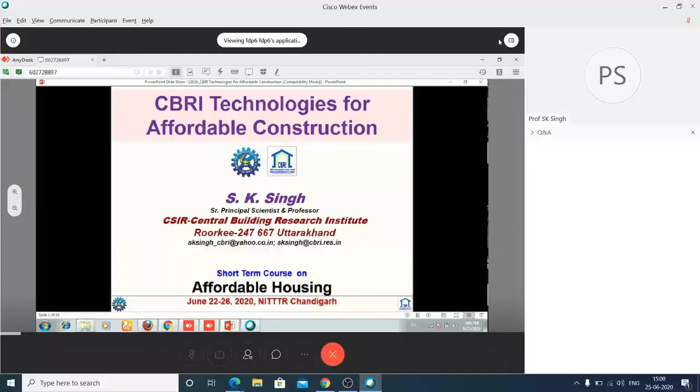Here, if you talk about affordability, it doesn't mean that we are talking about low cost. It means any person can have affordability, starting from EWS housing, LIG, and MIG. So we are going with that.

Before going to this one, I'd like to take 2 minutes on where we are working. CSIR Central Building Research Institute is working in 4-5 major areas: advanced materials, disaster mitigation, health monitoring, energy efficient building, and modeling and simulation. I'm heading the cement concrete composite group and polymer plastics and composite group. We have 2-3 groups in every area, and different divisions have been working.

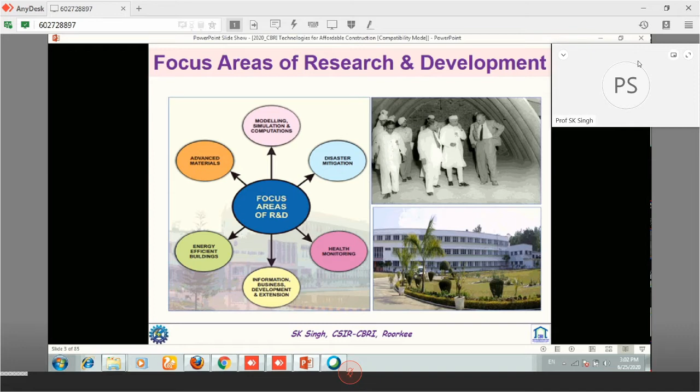CBRI was established just before independence, on 8th February 1947, by our Honorable first Prime Minister. The building was inaugurated by our first Prime Minister, but it was established in the University of Roorkee building with 5 people. So now I'm coming to the topic, which is affordable housing.

So we are talking about prefab precast systems, which will be affordable, and different types of systems have been coming up. There is partially precast construction, where CBRI has done very large work. Another is precast construction, tunnel form construction, large area formwork construction, lightweight concrete construction, cold-formed steel housing system, GFRG building system, EPS panel, ferrocement housing, and several other emerging trends in prefabricated and precast construction systems.

But if you talk about affordability, we particularly have to look into the vernacular material which can be properly utilized, and some precast systems where we can economize.

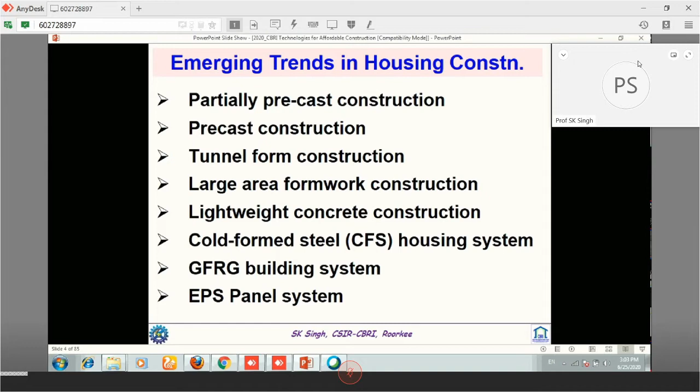When I talk about affordability through precast and prefab, it means we should utilize construction materials judiciously, reduce construction waste, reduce emissions, use durable materials, energy efficient building, materials that can be recycled, and construction systems that minimize air, water, and noise pollution.

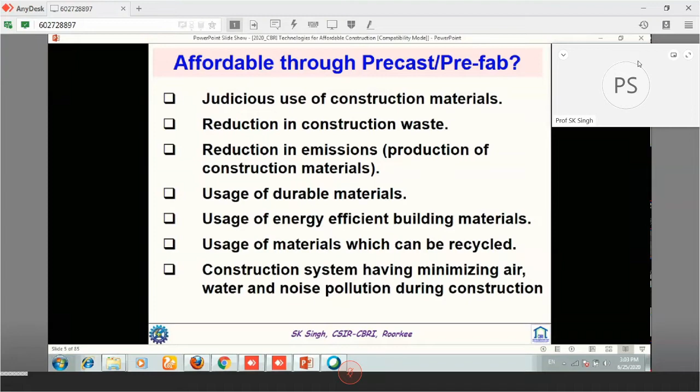CBRI has developed several technologies, but today we'll talk about precast walling components, such as stone masonry block, solid concrete block. We'll also talk about geopolymer, precast lintels, sunshades, and what CBRI developed in the past - the precast flooring roofing system, that is RC plank and joist, channel unit, rib slab, L panel, waffle units, brick panel, etc.

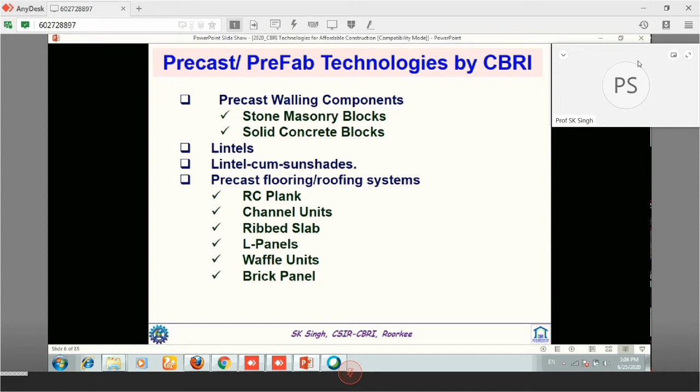We have utilized paving blocks with recycled aggregate, some part in geopolymer concrete, and several other technologies. It's a very good place where attendees or listeners can come and visit, and they can utilize these technologies in their own systems.

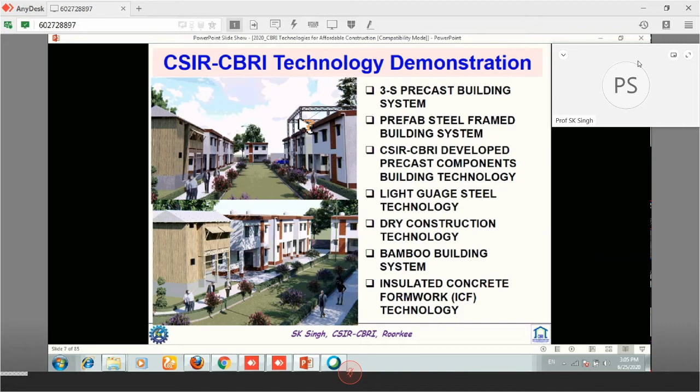Whenever we are proposing or developing any technology, our aim is to look into its functionality. So we are very cautious before submitting a proposal - it has to pass functionality tests, including fire resistance, seismic load, axial load, water tightness which is very important, thermal efficiency, durability, and comfort and other tests.

It has usually been observed that in these buildings, whether partially precast, semi precast, or complete precast, leakage and seepage was a major issue. So whatever we are developing, we have tried to resolve those issues and address them.

For comfort particularly, we have given emphasis on thermal studies, noise isolation, relative humidity studies, and indoor and outdoor air quality. We look into how it can fulfill our National Building Code of India 2016, and what comfort requirements we need, utilizing various types of materials developed at CBRI or at other places.

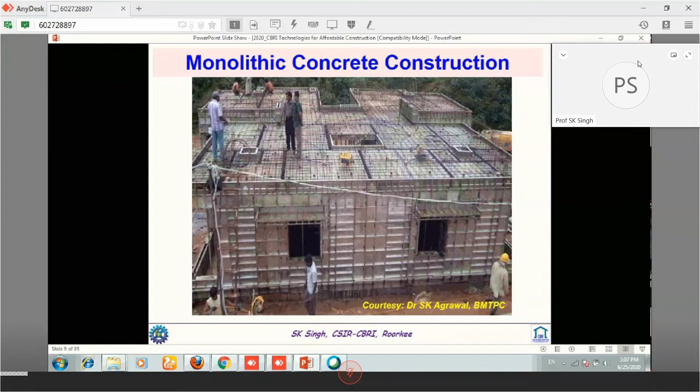We have not directly developed this technology, but we have been in the evaluation process along with BMTPC on monolithic concrete construction. In this system, the whole formwork is made, and all the reinforcement and other things are put into place, and concreting is carried out in one pour, meaning all units - walling, flooring, staircase, window openings - all those things are made together.

This type of building is customized, and up to G+3 has been constructed. This formwork is mainly made with aluminum, steel, and sometimes a plastic-aluminum composite. Some people have tried with plastic also, but there were deformations and other issues. So we use an appropriate grade of concrete with proper slump or flowability, and we have placed and constructed this type of building in different places.

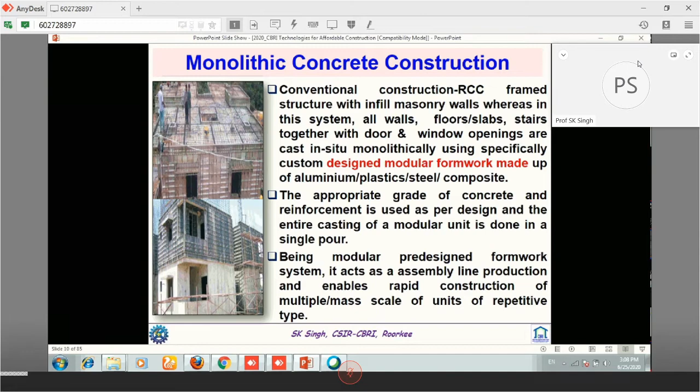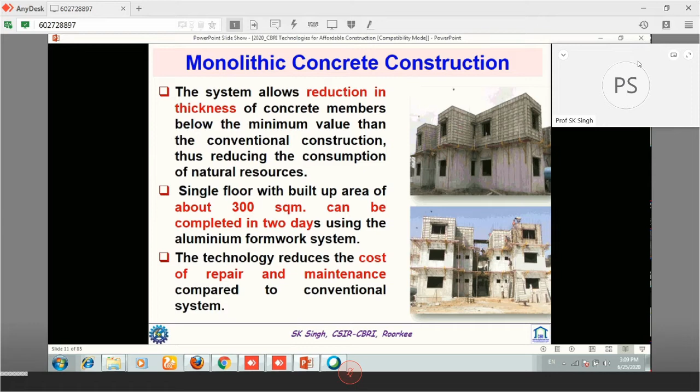A single floor with a built-up area of about 300 square meters has been completed within 2 days. This technology gives a very good walling and slab finish, and involves very little futuristic repair and maintenance work. So it is one of the best methods, and cost comparisons have been carried out. Looking at overall cost and life ratios, it is found to be very economical compared to the conventional system. Several people have tried to reduce the thickness for comfort level, so more industries are coming into this.

Houses have been constructed near Delhi as demonstrations, and you can look into that.

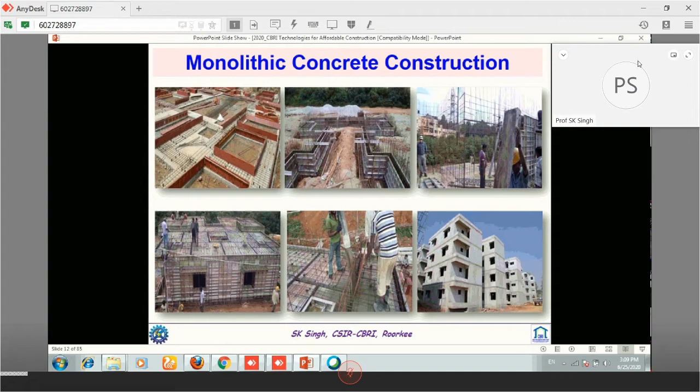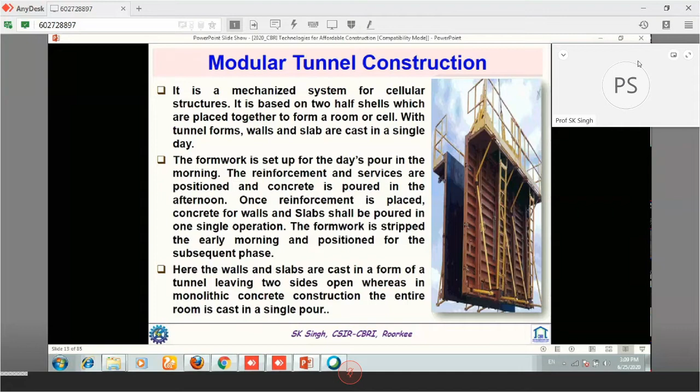Next is a modular tunnel construction system, which works in the same way, but here a different type of shuttering system has been created, and the thickness can be increased as needed. Pouring of the concrete is carried out in the same way.

It's a very fast and very economical system, but the economics only work when the number of units is in sufficient quantity so that the overhead cost can be minimized.

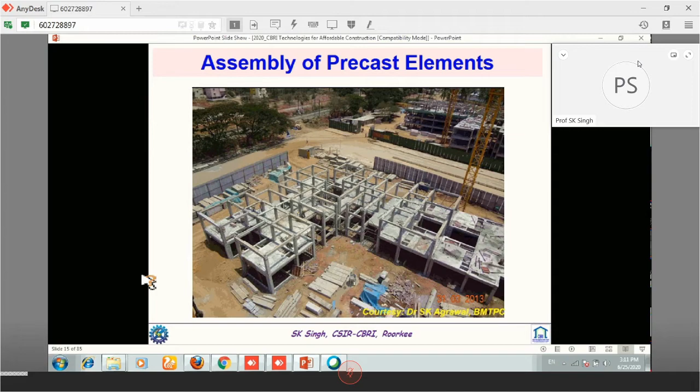We have also carried out different precast column and beam units. These are placed at one location, and self-compacting concrete with dowel bars is created and put into the slab. This type of construction is becoming more and more common in this system.

We carried out evaluations along with the B.G. Shirke group on the industrialized 3S system. Myself and Dr. Ajay Chaurasia were both involved. Particularly in this system, they are making G+7, G+8 buildings. More than 50,000 units have already been constructed in Delhi, Mumbai, and different parts of the country.

Recently, NIT Warangal was given an award worth 300 crores through this system, and it is very effective. Initially, people observed some problem of leakage at the joineries and other things, but that has been addressed properly in our next system.

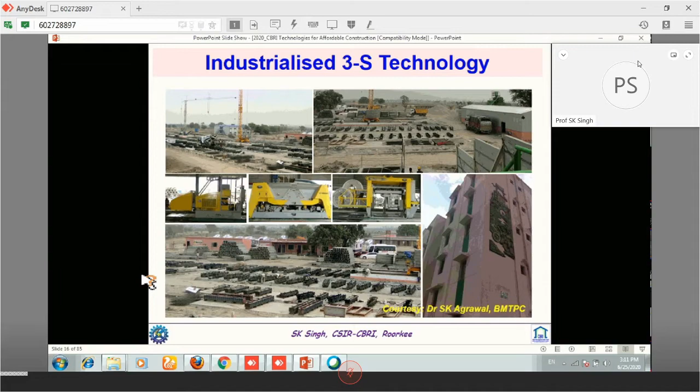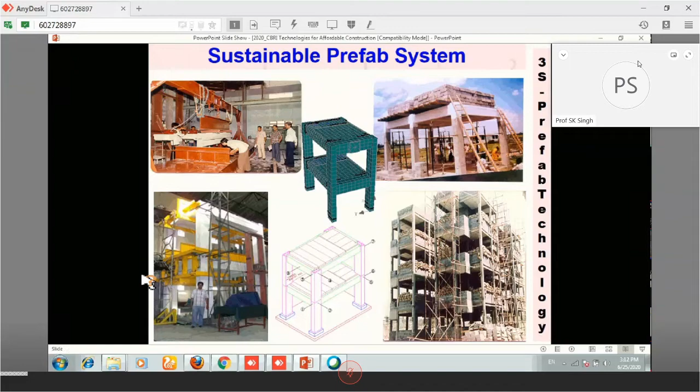This system has been evaluated at CBRI, in our laboratory. Dr. Ajay Chaurasia was project leader, and I was co-PI. We carried out all the testing of a G+1 storied building for lateral loading, and it performed well. Dead loadings and other tests were also carried out. This is another view of the seismic testing, and we have also done fire testing.

It's a very unique system, the 3S system. They use a hollow type column system, attached with dowel bar type connections to the beam system, and self-compacting concrete is poured into that, creating different floors. Very nicely, they have put an aerated autoclaved system on the flooring, and above that only a 50 to 55 mm thick screed concrete with minimum distribution reinforcement has been provided. This works fantastically in every way.

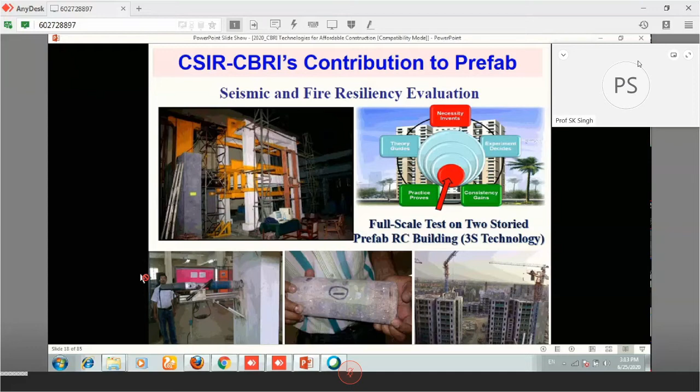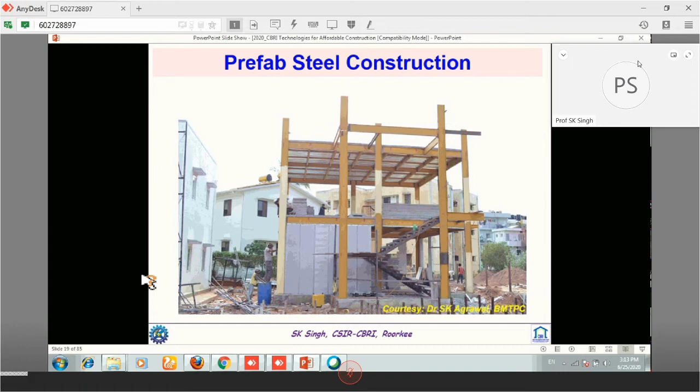Prefab steel construction definitely cannot be considered as economical, but it is affordable and a very quick and fast system. Different panels have been provided into the system. We have also done a demonstration house with the light gauge steel system and sandwich panel system, which provides good comfort.

Presently, light gauge steel structural system is becoming very popular. Several buildings in Uttarakhand and other places have been constructed. Near Dehradun, at one place called Selaqui, they have a plant fabricating this light gauge steel structural system; they have invested more than some 20 crore rupees, and all types of systems, all types of gauge, and up to G+4 storey buildings have been constructed with this system.

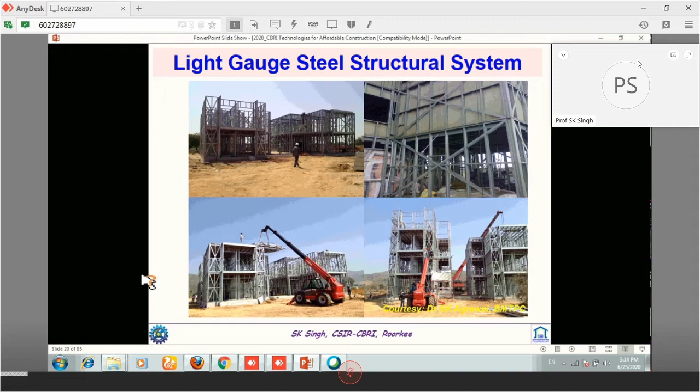Also, GFRG panel system. I'm not taking much time on these things. This Wafflecrete system was developed some 20-25 years back at CBRI, and a few people have taken the technology. Different types of waffles are made, then distribution reinforcement is provided and screed concrete over that into the main system. It is becoming popular nowadays.

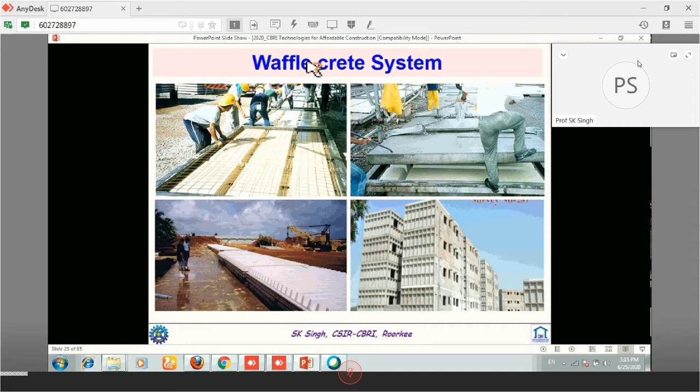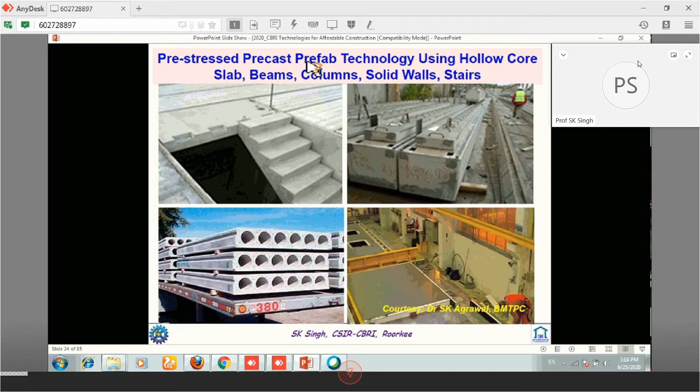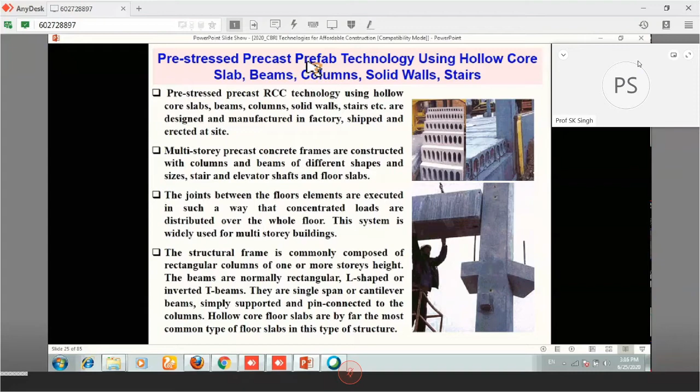This is again the hollow core slab and beam column system, with which a few buildings have been constructed, because in India prefab construction is still picking up, so it will take a little time, and we can carry out those systems. This one is very peculiar, where we have solid factory-made columns and beams, and then we put the hollow core slabs and other things over that.

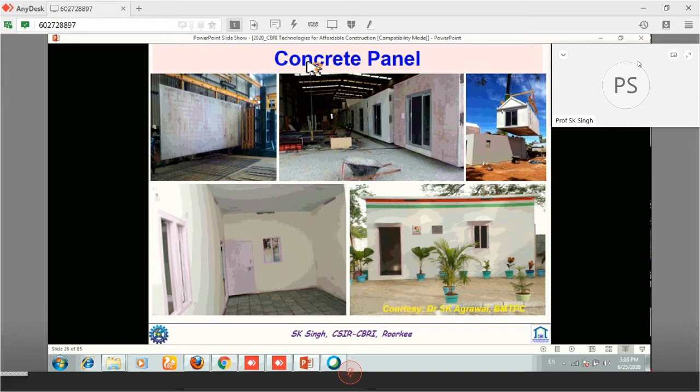This is a concrete panel, and again, it is becoming a very popular and very affordable system. This is again an expanded steel mesh panel system, and in place of EPS, they are using polystyrene beads, and it has been performing very nicely, and its behavior in fire has also been found very effective.

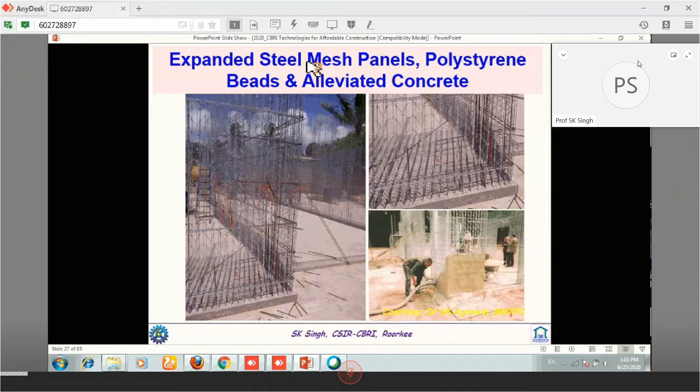I am coming to the CBRI technology. We have made more than several lakhs of buildings with the partial prefabricated system, called the joist and panel system, and this has been made in Delhi, some 20,000 in different places. We have made a rib, and the joist is some 100 mm wide and 130 mm deep, and it varies from 150 to 300 sometimes as required. Wherever we have done the panelling, the panel is 60 mm thick, and minimum reinforcement of 6 mm has been provided.

Other technologies, like the L panel and others, we are going to discuss one by one. But here we have done a partial system in the roofing unit, sometimes columns, windows, staircases, and it has been found very cost effective. Initially those low cost housing buildings were constructed in Delhi and other parts of the country with this system, and this precast system has been very effective.

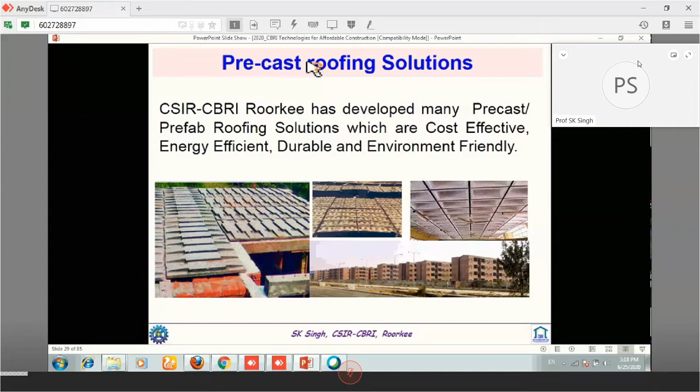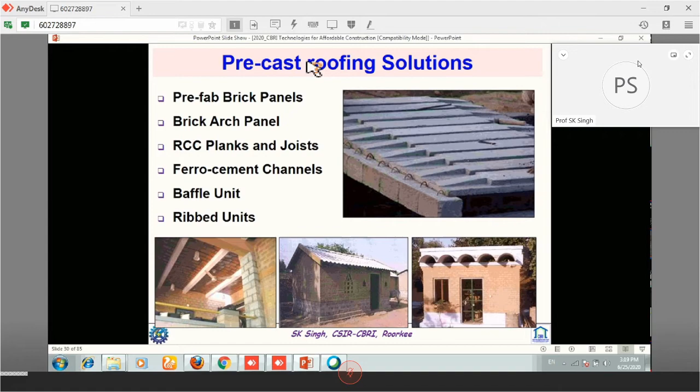We have other systems also: prefab brick panel system, brick arch panel system, and, as we said, the planks and joist system. Ferro cement channels have been developed by CBRI, and waffle units and ribbed units have been constructed. In the prefab brick panel for roofing, the RC joist is usually 130 mm wide and 100 mm deep, to place the brick panels over those RCC joists.

Brick panel sizes are 530 mm wide, 900 to 1200 mm long, and 75 mm deep. To make these brick panels, only two numbers of 6 mm dia bars are used, I am going to show you this one, and we provide cement concrete of 30 to 40 mm thickness over the panel and joist as screed concrete.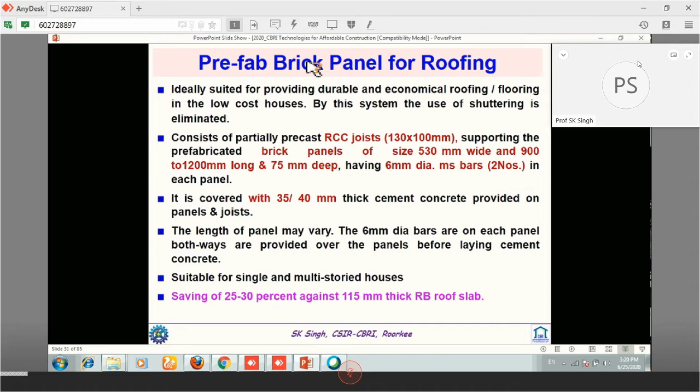Due to very little reinforcing steel, or saving of steel, one thing has been found: wherever this type of brick panel unit has been constructed, the corrosion problem was very less, and overall cost is reduced by 25 to 30%, because of the reduced thickness, against a 115 thick reinforced brick roof slab. So it is very good, and at several places people are trying this type of system right now. This is the view: this is the joist, and these are the brick panels. I am showing you a closer view.

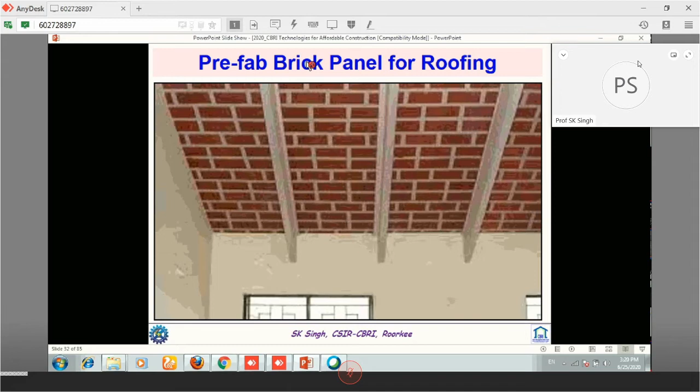The IS codes 14142 and 14143 have been made by CBRI, where all the design and construction details are given for prefabricated brick panels and partially precast concrete joists for flooring and roofing. So you can look into those codes also.

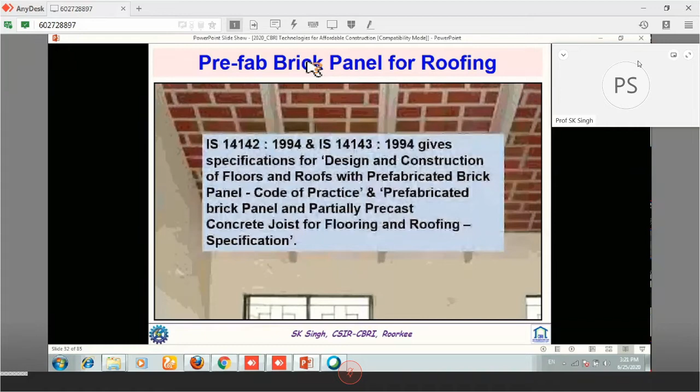This is our joist. It can have some 3 meter to 5 meter of length, and a simple 6 mm bar will be folded like this way, and the depth of this beam is kept 100 and width is 130. So on all the sides, brick panels will be made, and then over that simply M20 or M15 grade concrete is sufficient to fill up those reinforcing bars. So it is very economical and cheap, and at several places we have constructed this thing.

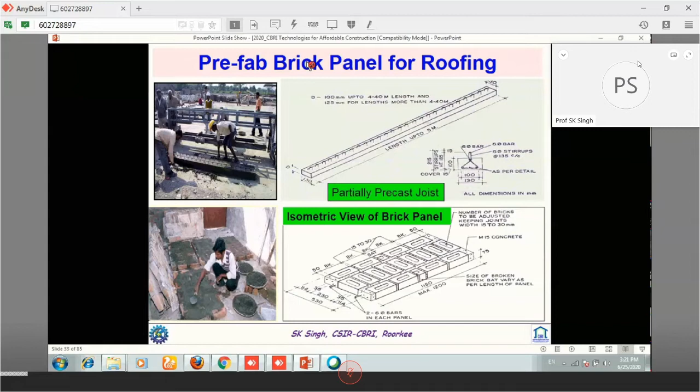Sometimes people want a very good brick view, so people do it, and sometimes people make it plaster. It's very good because no cost for shuttering will be required. It's very fast if you make these brick panels and transport them to the roofing unit, so it will be economical. Also its conductivity is less, so thermally it has been found that compared to a reinforced cement concrete roof slab it is effective, with a reduction in temperature of about 20 to 25%, meaning a variation of 3 to 4 degrees inside the room.

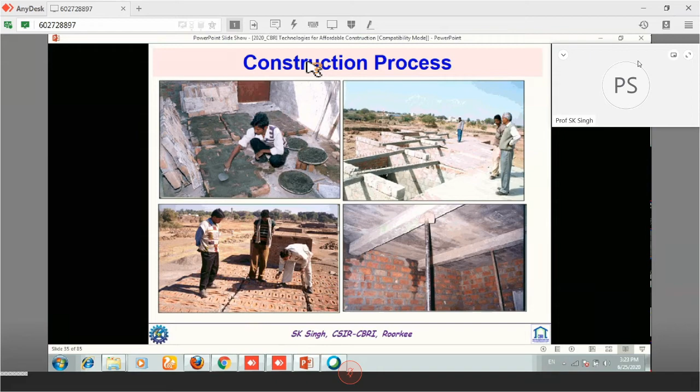This process has been explained. Simply the walling unit is made, then the joist is placed, then panels are placed over that. On top of that, only 35 to 40 thick screed concrete of M15 has been carried out. It is sufficient for that. Also it is durable because we put compaction by simple hand or by tampers and other things in a very good way.

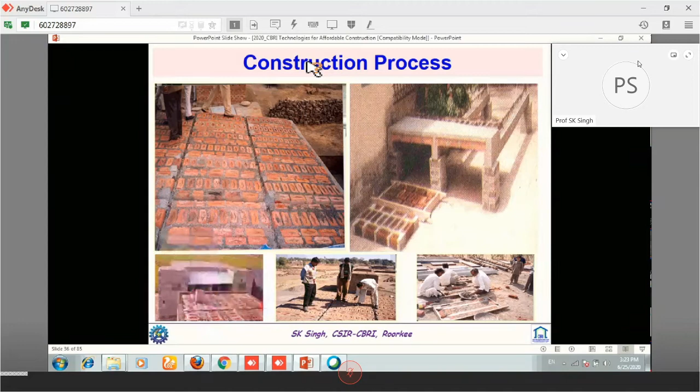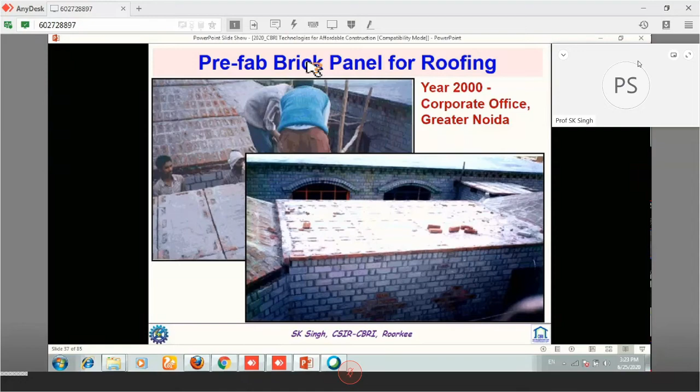This is the construction at Greater Noida in year 2000, and at several new places people have constructed it. Nowadays, when people talk about energy efficient buildings with a unique look, people are making it on their top floor and other places also.

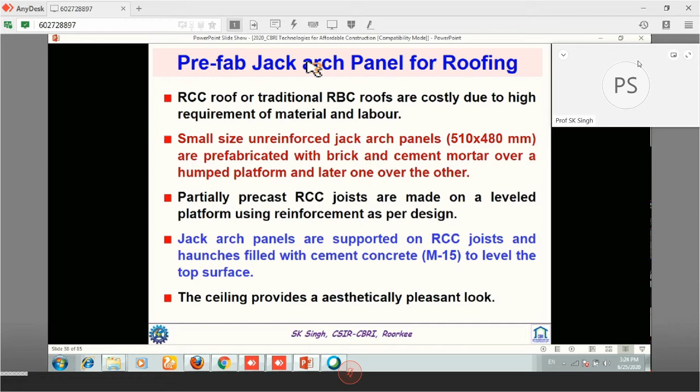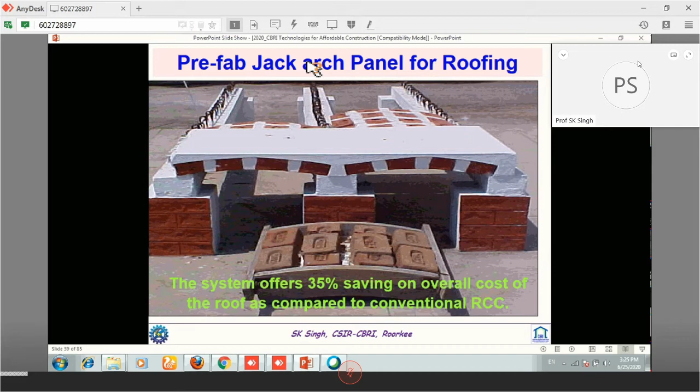If you look into it, it's very small, good and efficient, and look-wise from below, a very nice arch appears in any building, and people prefer those vernacular things. This system has been found to give a cost saving in roofing of about 35% over a reinforced cement concrete roof of 115 thick.

These panels have been made, as we have discussed. This is RC planks and joist, and different sizes of planks have been made and placed over the joist. If anybody has visited CBRI, all our scientist apartments, G+1, have been made this way, and particularly in Burari and other places in Delhi, some 10,000 to 20,000 houses have been made with this system of precast planks and joist, and those have been very efficient and people are living in them. That was particularly for EWS housing or low cost housing.

Nowadays, I have done in my lab a 3 meter long, 600 wide panel with geopolymer. Because lifting has changed, this cross section goes up to 4.2 meter long, and we are going for more and more. Accordingly, joists are placed, and it has been found that overall cost saving is about 20%, with 25% saving in cement and more than 10% in steel compared to the conventional reinforced concrete slab system.

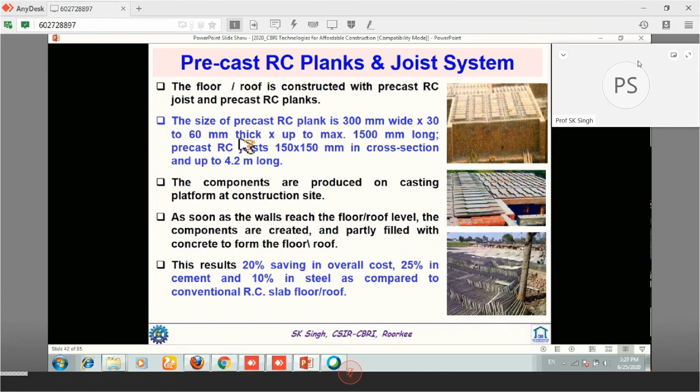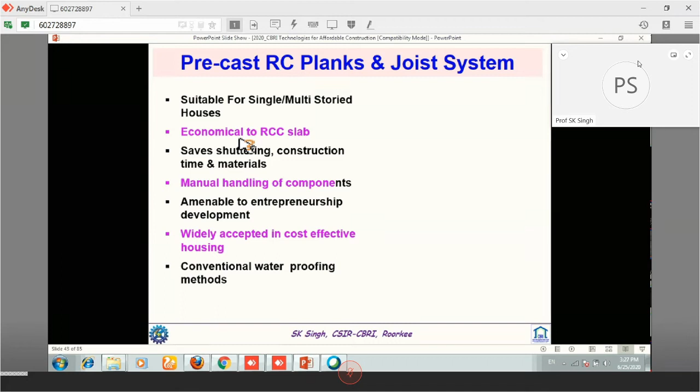These slabs have been made in different places, in thousands and thousands, very economical. And with this system, I'm not sure, but more than several lakhs of buildings or housing units have been made in different places of the country.

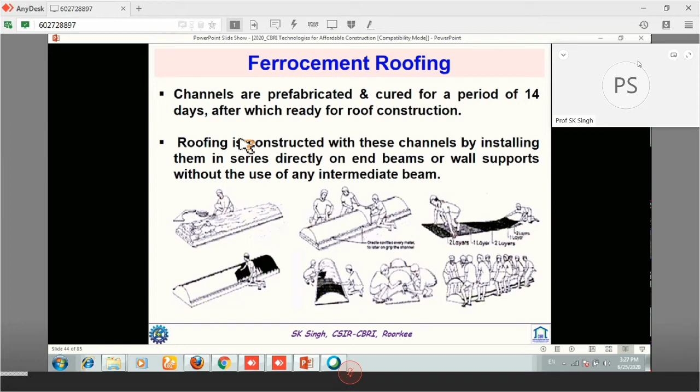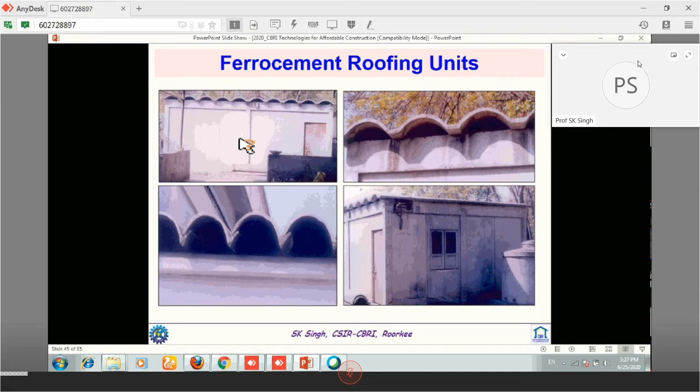Also, we have worked on ferro cement roofing units, and we have done it successfully. We have demonstrated at different places different types, with curvilinear shapes, minimizing the thickness. Thickness we have kept about 25 to 30, with some small false ceiling below that on the room side. So different types of systems have been made, temples and other things.

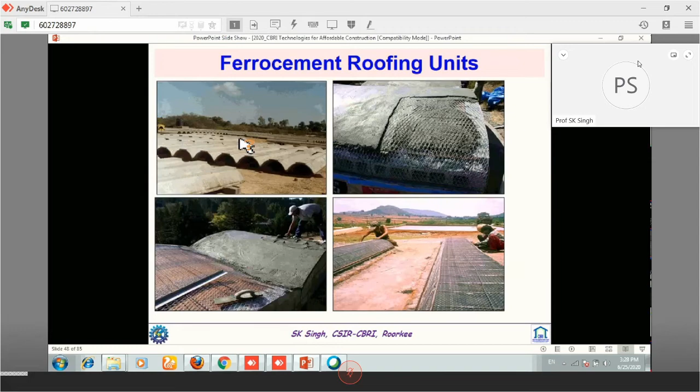I'm not going through this one. This is being demonstrated, and different types of units have been made and constructed. I was very young when I was making this one, I was 27 years old, and we constructed this type of houses in Meghalaya and other places in the Northeast.

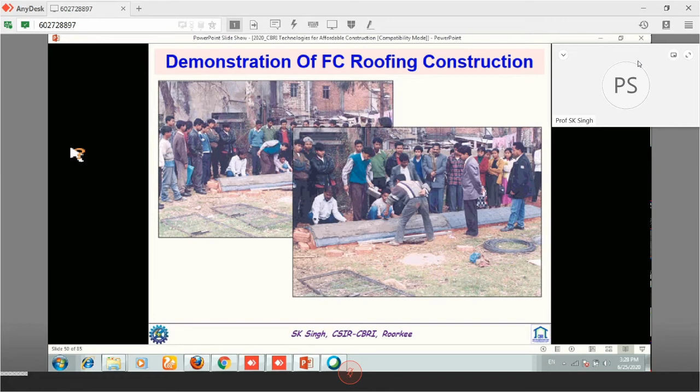And different types of ferro cement products, walling units, water tanks, cupboards, all those things have been made. Doors have been demonstrated, toilets, cabins, security cabins. Also, CBRI has done work and developed codes on the L panel, particularly for sloping roofing of single-storied buildings. That is very effective with a very small thickness. If you look, very long panels have been constructed here, and these are the houses with those roofing units.

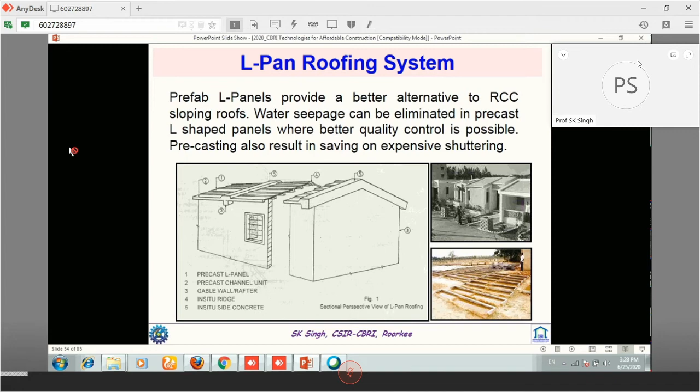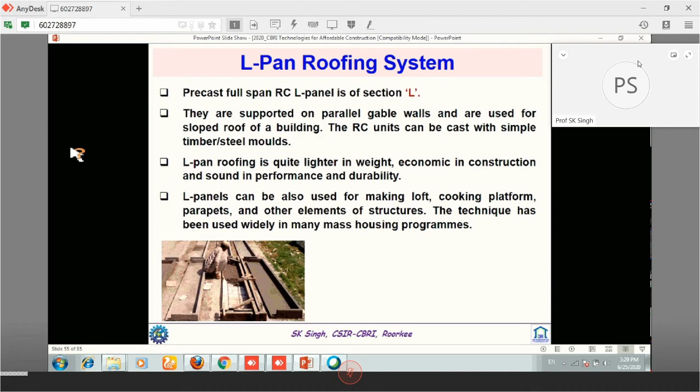For this type of thing we have developed a code also. Codes are there, and it's very effective for roofing slabs. This is done with the precast channel system from way back. This is IS 14201 and IS 14215. So we put a channel.

Recently in our CBRI colony, we made one school's roof slabs with this, and it is performing very well. Simply two reinforcement bars of 8, and 1:3:9 cement mortar or cement sand aggregate concrete has been placed and filled up, and then we have a finishing layer over that. So these have been constructed.

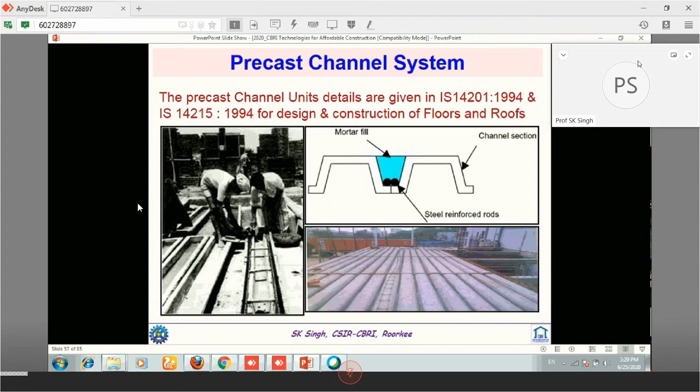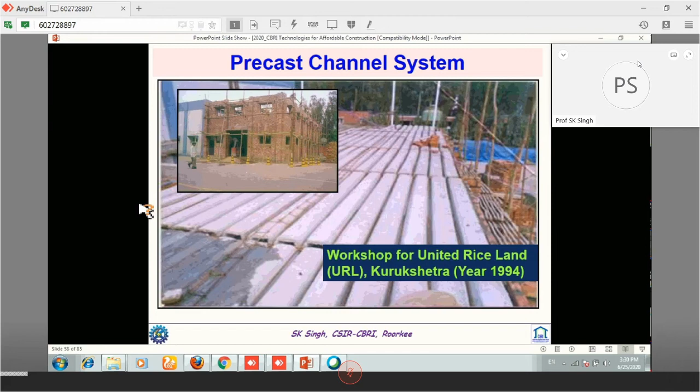Way back I did work with the URL United Rice Land, and I found they have constructed several units with our precast channel system. I was associated with the URL in 1996, and I found they had done work with this CBRI system there. Also, CBRI has developed a precast waffle unit, for longer spans, big halls and other things. Those have been constructed.

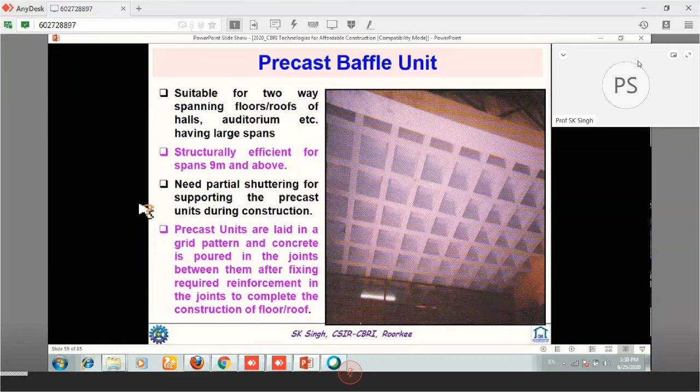These are different views of the precast waffle system. Also, we have done the cored unit RC system. It performed very nicely for roofing as well as walling units, and it was found to be a very energy efficient system. And CBRI's mechanical group has done the mechanization. Recently we have also carried out walling units with the phosphogypsum system, and the technology has been transferred to Navino Industries in Gujarat.

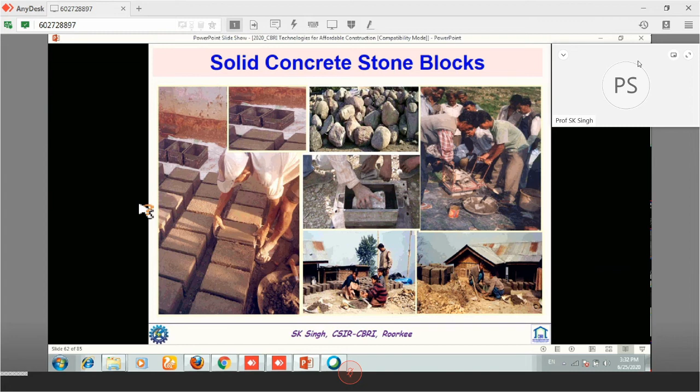Okay, so I'm coming to some other things. CBRI has done a lot, particularly in precast roofing, precast staircases, precast systems. Also, for affordable housing, we have done walling units, particularly in hilly areas. In Himachal and Uttarakhand, where a lot of stones are there, we have made solid concrete stone blocks in bigger sizes, with rammed cement, fine aggregate and coarse aggregate in 1:3:9 sometimes. Some people have done 1:4:12, rammed, and these blocks have been utilized in different parts of Uttarakhand and other places.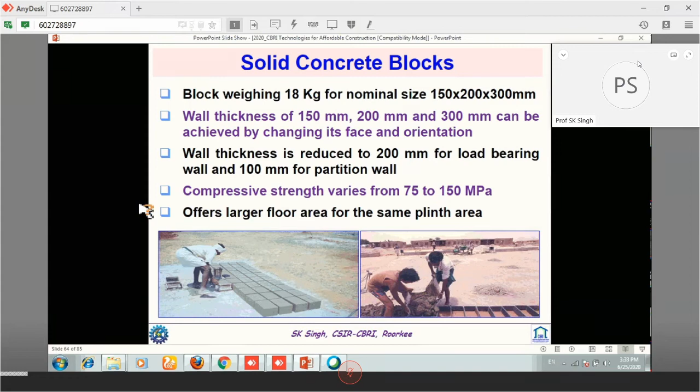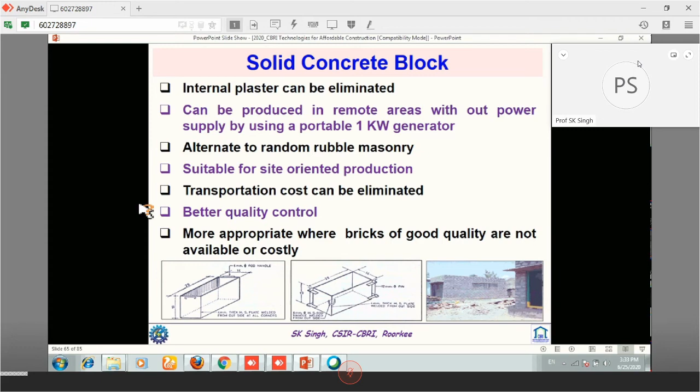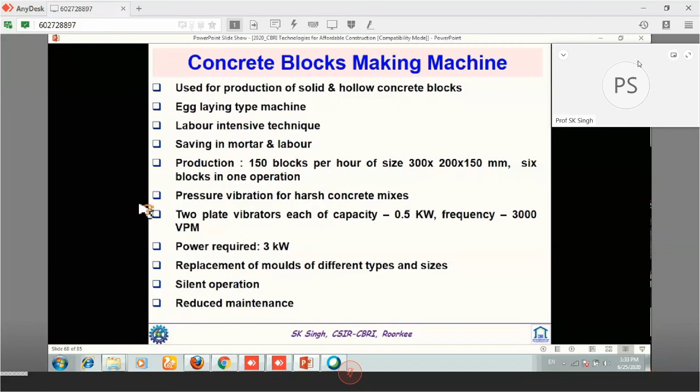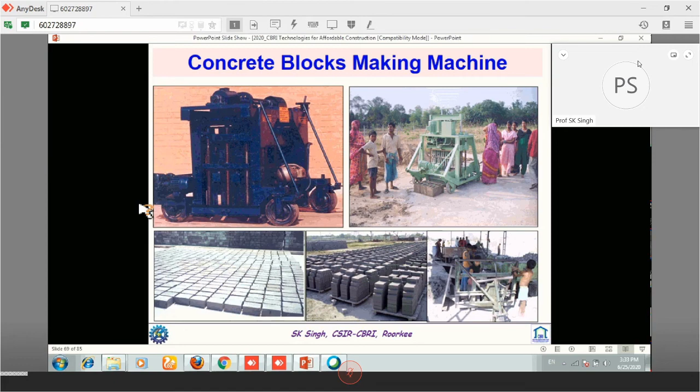Still so many people come and take these things, and they are making this solid concrete block system in hilly areas. Different mechanization, small egg laying type mechanizations, has been carried out. Also we have worked on the small CBRI hollow block system. We have developed and trained, and several industries near Yamuna Nagar, Delhi, and other places have taken the technology for the hollow block as well as the solid block system.

Here you can look into the mass productions, recent photographs. I will come to that next. What we have done, we have carried out a lot of work on recycled aggregate concrete, particularly on making paving blocks, that is a flooring unit, and other things. It was a very big challenge, and we are working continuously on this.

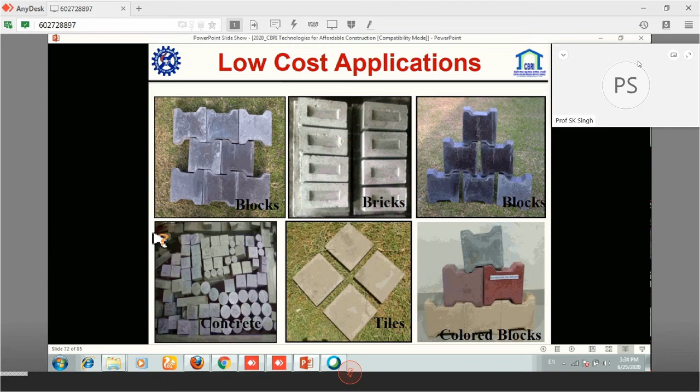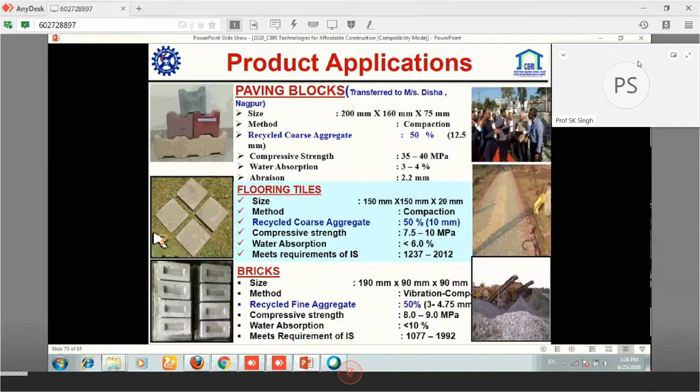So the technology we have made has been taken by 3-4 industries. They are making bricks and blocks. Also we have tried with colored blocks, tiles have been made, and different types have been made. With this technology, at several places in our campus we have made pathways and other things. We have gone up to M40 grade, with a lot of saving, and we have given the technology to production units where recycled aggregate plants have been put.

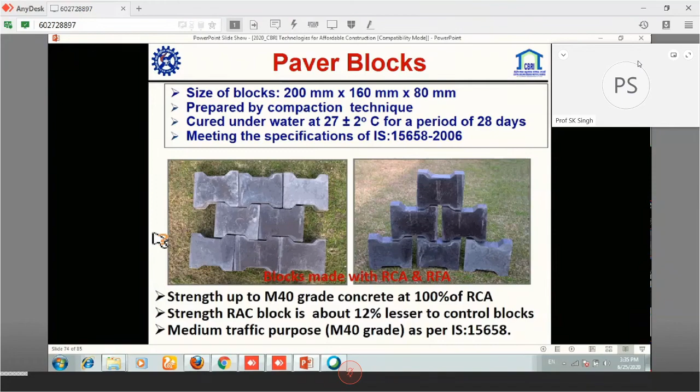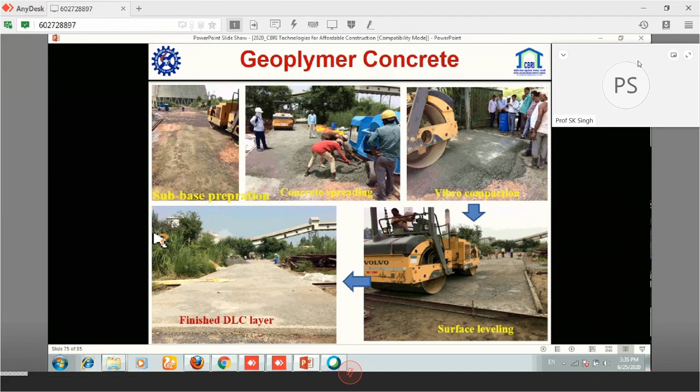Also, we have carried out a lot of work on geopolymer concrete, which is cement-free concrete. CBRI has found that its cost will be comparable to standard cement concrete, and we are using it for small places of 100 thick in the colony and other places. We are making this DLC layer, and we have done this work. We have made roads in different places. Only two photographs I am showing. One road has been made in CBRI, another at NTPC Dadri, and at several places we have made these cement-free geopolymer concrete roads.

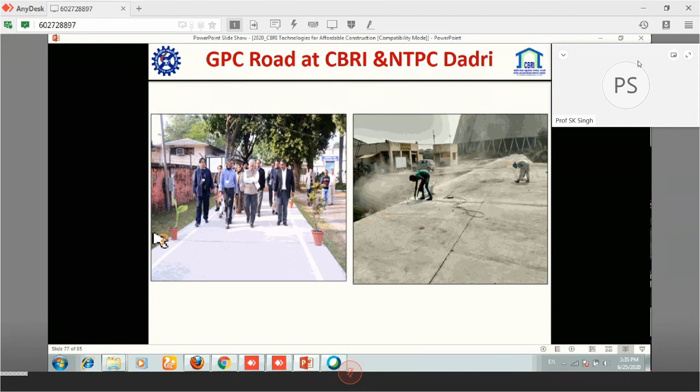Also, CBRI has done wood without tree, meaning we have developed an affordable wood system with rice husk plastic wood, and that technology has been transferred to one industry in Delhi and another in Gwalior, and they are making all types of products with this rice husk plastic wood system. You know that we have more than 20 million tons per annum of rice husk. Rice husk is being used in other places also, but a lot of it is not utilized. So we have tried this as an alternative wood fiber system.

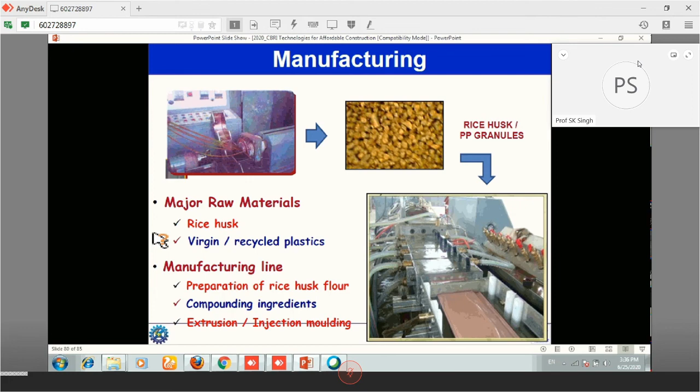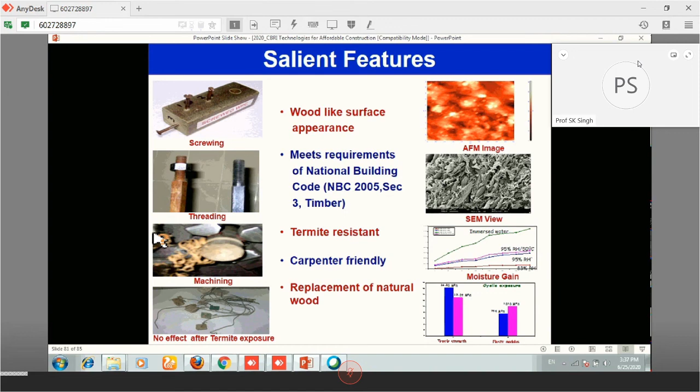These rice husk granules have been made here. If you look into these granules, virgin and recycled plastics were used as a binder, and the wood has been made. All the tests on this have been done: fire, screwing, threading, termite, and all those properties have been found equal or better than normal good quality hardwood. So it has been very good. This is in profile, decking units, doors, windows. They are making and selling pallets, fabrications and other things.

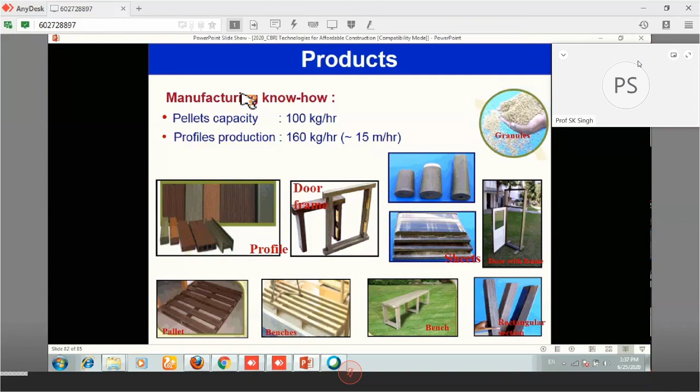Okay, so I'm concluding. Usually affordable housing cannot be made without prefabrication. If you're talking about affordability, with vernacular or locally available materials, with bamboo, wood, concrete, whatever materials we are getting, we can construct with prefab or precast methods. Nowadays very good heavy duty cranes are available, and we can place all those elements properly. Usually people had a lot of problems with leaks, since the units were of small sizes.

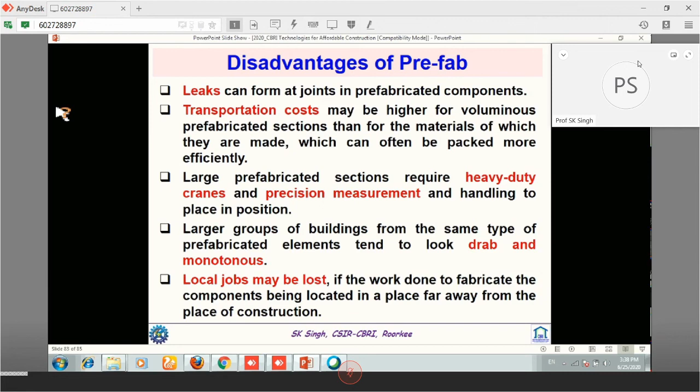Now 1.5 meter to 2 meter wide planks have been cast, and different joineries have been developed. With the advancement of good waterproofing compounds and systems, we are able to address those issues in a very efficient manner, so that we can do affordable housing. Again, affordable housing doesn't mean low cost housing. It has to be affordable with good quality, good comfort, and good facilities.

Nowadays the Government of India, particularly the Ministry of Urban Development, BMTPC, the Building Materials and Technology Promotion Council, and others are continuously working on this and moving towards precast systems, which definitely reduce wastage, since there is a very high level of wastage in our country with cast in situ construction. CBRI has done a lot of work, and we are still working on partially precast prefab technology, which is ideal for hilly areas and other places where vernacular materials are locally available. Walling units, roofing, staircases, sunshades and other things can be made with the precast system.